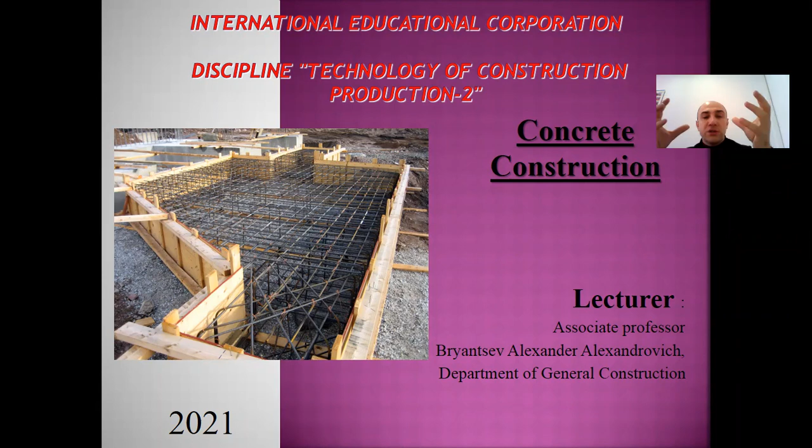Concrete construction was invented and mostly began to be used in the 19th century. At that time it revolutionized the construction industry, and concrete became one of the world's most common building materials.

Now let's discuss construction applications of concrete. If we talk about the major uses of concrete, I will give you some examples, and we'll discuss each of them separately.

For example, concrete dams. In this case, characteristics of concrete such as higher strength and unit weight make it more suitable for dam construction. Dams are used to store water and produce electricity. The loads imposed on a dam due to water pressure are very intense, which makes concrete a suitable material for dam construction.

Concrete is used in residential buildings: construction of small buildings, villas, and high-rise buildings. All of these are done using concrete with traditional or modern formwork as a method of construction of the frame, from the foundations to the slabs, columns, beams, overlappings, walls, and so on. All main construction elements are made from concrete.

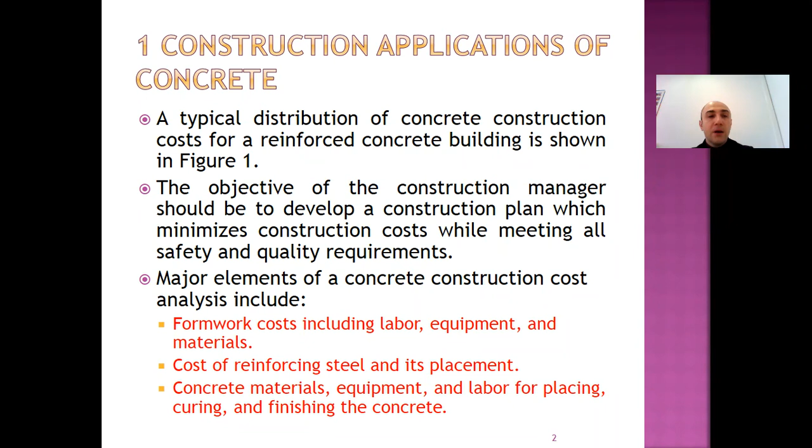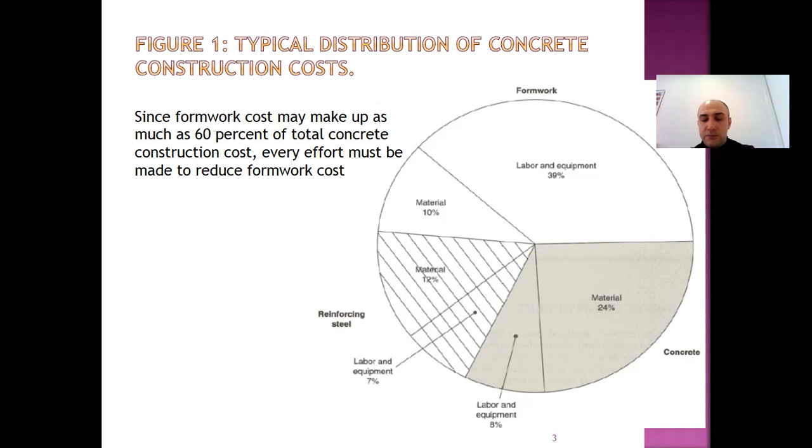What about application? Applications of concrete can be divided into cast-in-place concrete, precast concrete, pre-stressed concrete, and architectural concrete. Each of these application types will be discussed separately in the next slides.

But what about other uses of concrete? We know it is one of the important parts of the building. If we compare it with others, the priority of this material will be higher than wood, steel, masonry, and other construction materials.

Concrete, once cast and cured, does not require any maintenance and can hold up against any weather conditions. Concrete is a non-combustible, non-decaying material, which makes it inert—it does not burn, mildew, or feed rot. Its structural integrity provides an added degree of protection from severe weather as well as earthquakes.

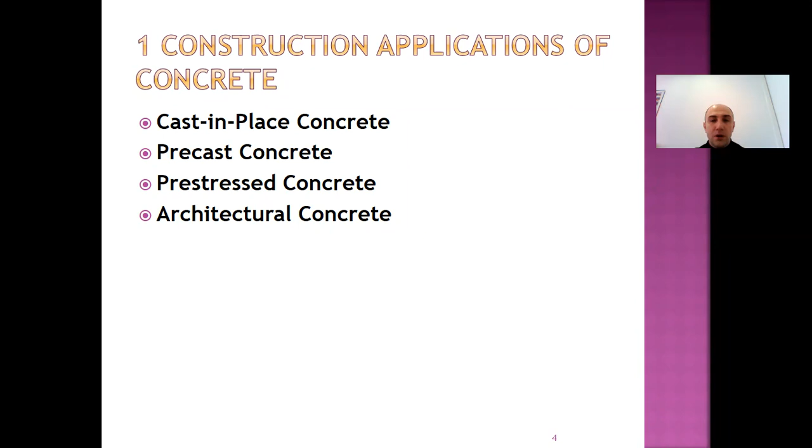Concrete is produced from available materials, so it leaves a small environmental footprint while still providing a higher level of durability. It can also be shaped—we can create various shapes from freshly mixed concrete mass. Concrete floor can be stamped to create a very attractive surface, so it can admit natural light during the day and transmit artificial light after dark. It's durable and cost-effective, which is a necessity for underground use.

Cast-in-place concrete, also called monolithic concrete, is one of the popular types of concrete applied in the construction site. Cast-in-place concrete is a technology of building construction where walls and slabs are cast at the site in formwork. This differs from precast concrete technology where slabs are cast elsewhere and then brought to the construction site and assembled.

It uses concrete slab for walls instead of bricks or wooden panels. Formwork is used for both walls and roof.

Advantages of this technology are strength of the building, insulation, and versatility for different types of buildings. Disadvantages—one important disadvantage is the requirement of higher labor, the time of hardening, and the big self-mass of the construction.

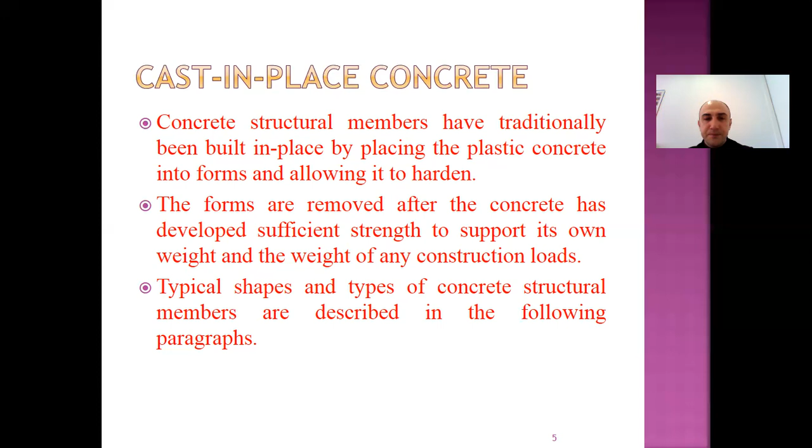Walls and wall footings—cast-in-place concrete walls are made with ready mix concrete placed into removable forms erected on the site. Historically, this has been one of the most common forms of building basement walls.

The same technology used below can be repeated above grade to form the first floor and upper levels of a home. This technology was done maybe more than 100 years ago, and we see the benefit of building homes with concrete well before it was widely understood.

As the technology developed, improvements in forming systems and insulation materials increased the ease and appeal of using removable forms for single family construction, for example. They show good results, and the systems are really strong. Traditional finishes can be applied to interior and exterior faces, so buildings look similar to frame construction.

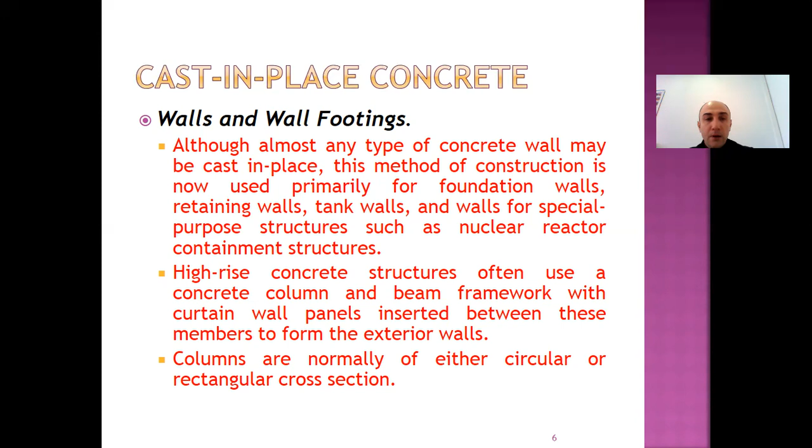If we talk about advantages and some features of cast-in-place concrete, we need to say that cast-in-place concrete provides benefits to builders and building owners, like strong walls, safety, and disaster resistance—disasters meaning natural disasters like earthquakes, fires, blows, and so on.

Insect resistance is also one of the important things—for example, in wooden construction, insect resistance is not at a high level. Sound blocking ability can protect from sound penetration, so for insulated systems there is energy efficiency and resulting cost savings.

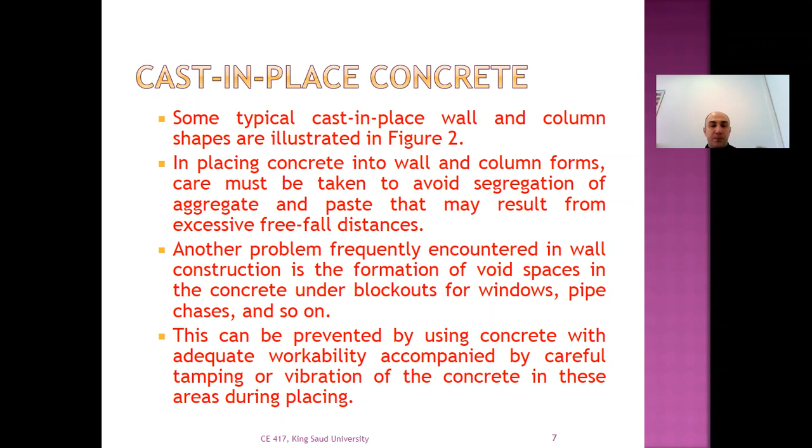Its ability to support and resist compressive loads far exceeds what it can support and resist in tension. So, if concrete is used in construction where tension stresses will develop beyond what the concrete alone can safely resist, steel reinforcing bars are installed to take up the tension stresses.

What about shapes? In cast-in-place columns and walls, in general various shapes can be used. But there are the most popular types often used in cast-in-place construction, and they are rectangular, square, and circle. Circle is used according to the simplicity of installation, and for attractive view, design, or architectural purposes. Rectangular and square shapes show good bearing capacity characteristics, that's why they are more often used in construction.

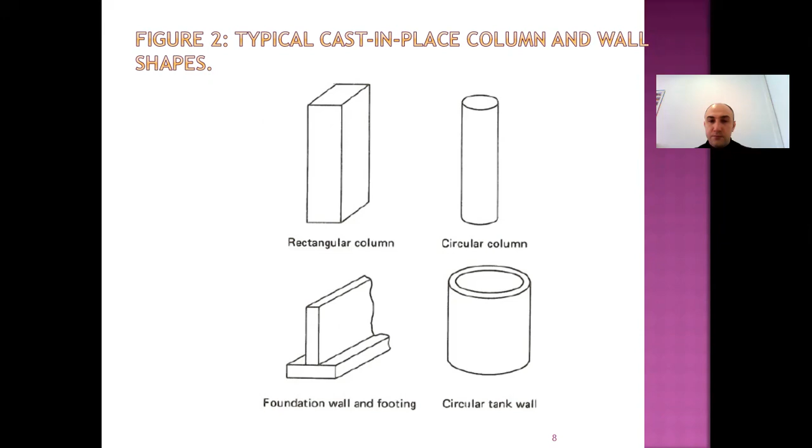Floors and roofs. The construction method of cast-in-place concrete hollow building roof of the present invention belongs to a kind of construction method of building superstructure. Specifically, it plays the effect of the inner template of cast-in-place concrete by the prepared hollow filling pieces. This significantly reduces construction time, elevates floor dead weight reduction, and increases the distance of reinforcing bar to the cross-sectional axis, thereby really increasing the bending rigidity of the floor. So it fully exploits the mechanical properties of reinforcing bars and concrete material.

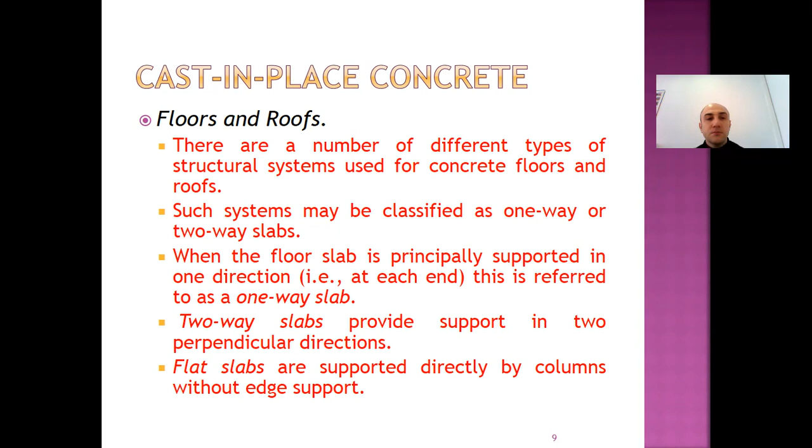Flat slabs. A flat plate is a two-way system, usually supported directly on the columns or load-bearing walls. The main feature of the flat plate floor is uniform thickness with a flat soffit, which requires a simpler formwork and is easy to construct.

The floor allows great flexibility for locating horizontal services above the suspended ceilings, or a flat plate with prestressing tendons results in longer span and thinner slabs. The advantage is that it typically has the lowest floor-to-floor cycle time of the cast-in-situ options, due to the most simplified formwork and reinforcement detailing, so no beams underfloor surfaces, minimum structural depth, reduced floor-to-floor height. The disadvantage is that long-term deflection may be a controlling factor, and it may not be suitable for heavy loadings or heavy forces.

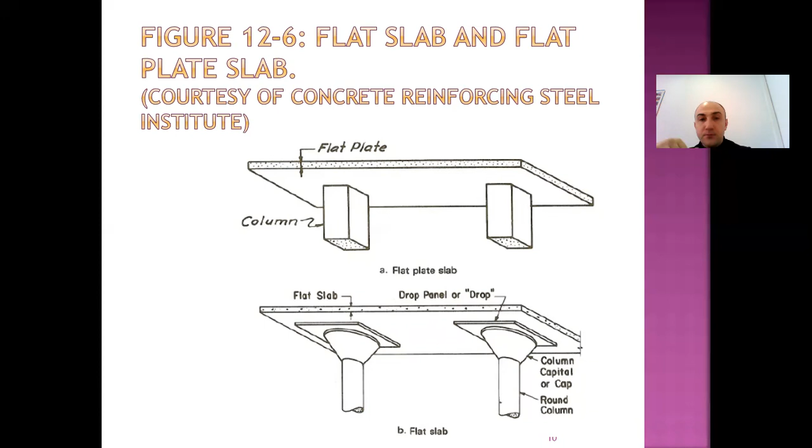There's a higher concentration of reinforcement around the columns in order to ensure the slabs have adequate shear capacity. Two-way slabs have drop panels formed by thickening the bottom of the slab around the columns, increasing the shear capacity and stiffness of the slab, allowing thinner slabs to be used. Flat slabs with prestressing tendons result in longer spans and thinner slabs.

These slabs are economical in spans up to 14 meters square panels. Thickness is governed by deflection, shear around columns, and shear in the ribs. They're mostly used in car parks, office buildings, and roofing. The main disadvantage is higher formwork cost than other slab systems, slightly greater floor thickness, slower floor-to-floor cycle, and it requires square or rectangular columns with a grid arrangement.

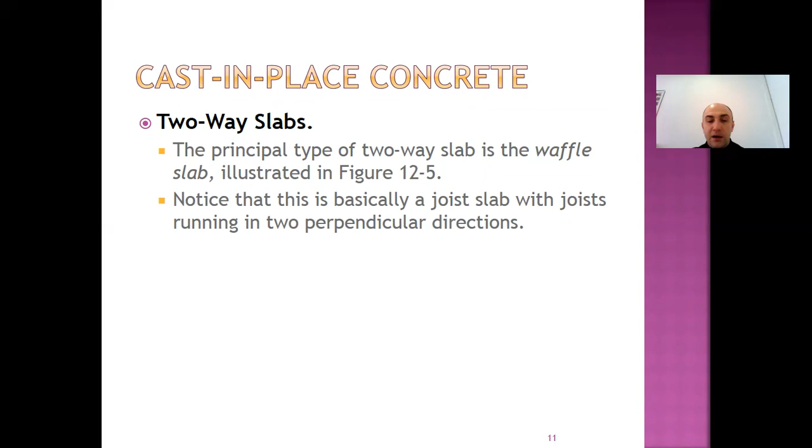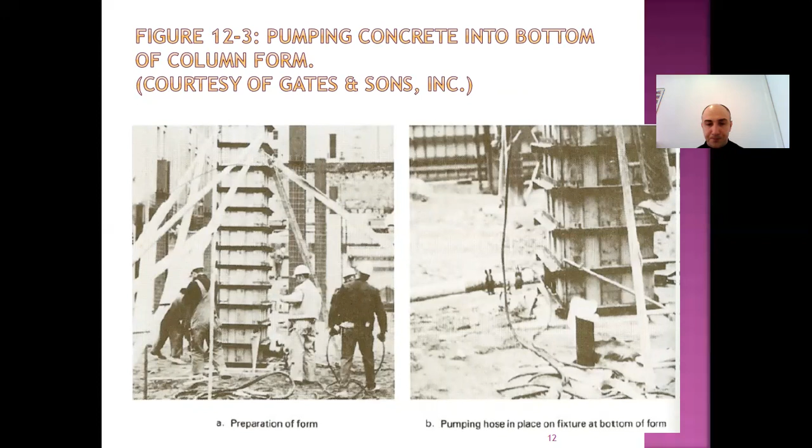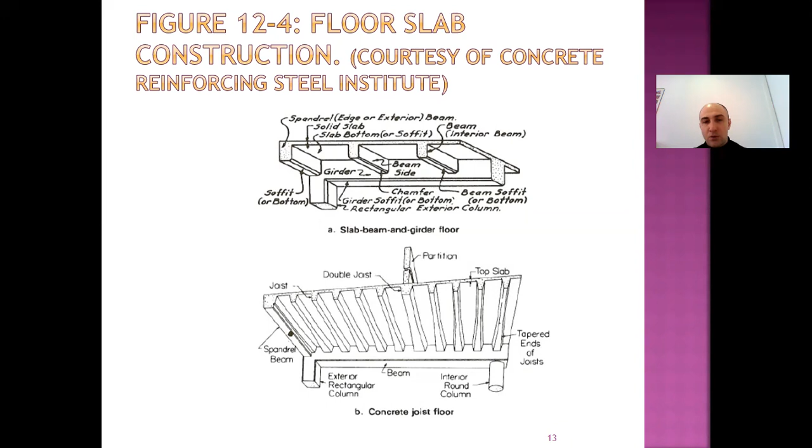And we see the form of square columns and rectangular columns. In this slide, we see the floor slab with integrated beams, cross-sectional beams and longitudinal beams. These beams are also called joists. Joists are generally supported by the main beam, and the beam by its two ends is supported by the interior or exterior columns. The main application of these slabs is public buildings and industrial buildings with big spans. According to the higher bearing capacity of these slabs, they can be applied not only in cast-in-place construction but also in prefabricated construction.